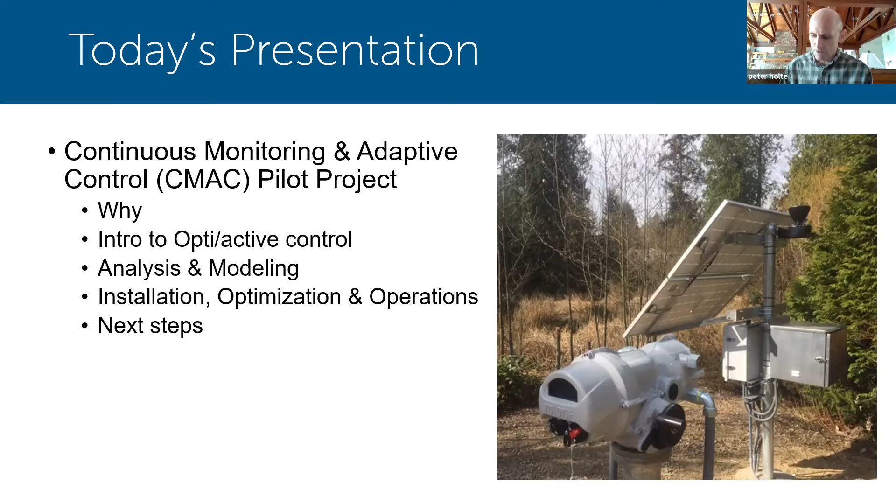So first of all, City of Redmond has a watershed management plan we've had since 2013. It divides the city into about 13 different watersheds. And very simply, the goal of the watershed management plan is to create environmental lift by working in the entire drainages that drain into streams.

One of our watersheds in the upper northeast corner of Redmond is called Monticello Watershed. It's about 345 acres. Part of it is in King County, part of it is in Redmond, most of it in Redmond. It's considered a priority watershed, meaning that although it has some significant stormwater impacts, it also has a great opportunity for environmental lift if we take some action there.

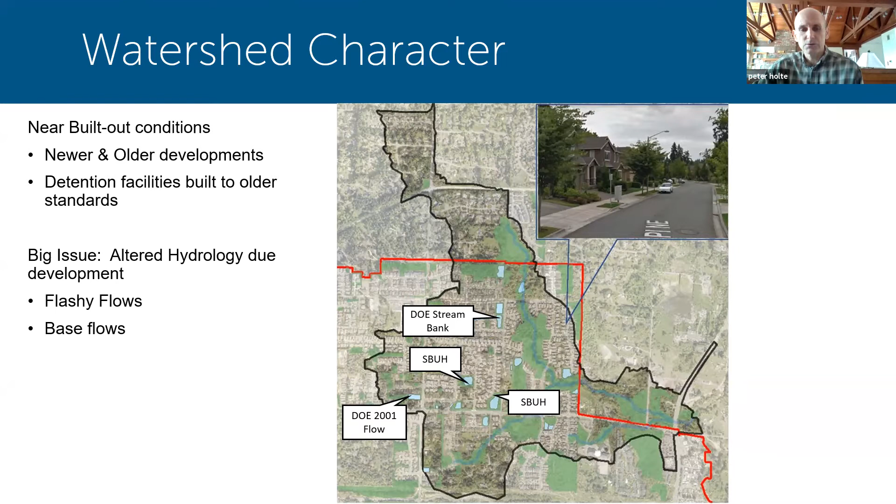So, the real question for increasing environmental lift in this watershed is, how do we deal with the hydrology? And so we know we need to do a couple things. One, we want to try to reduce runoff. And then we also know that we want to extend detention in the watershed. But there's a couple limiting factors that you have to consider when we're trying to do these things.

One of the things is that, like many hillside watersheds throughout this region, this is influenced by till soils. We have till soils that don't want to infiltrate water readily. And so that really limits some of the things we can do there.

Another thing that we have going on is that because we are in kind of a near build-out condition, there's not a lot of space to work in. So if you want to try to rebuild a pond or extend a pond, you can run into space issues. But not only can you run into space issues, you can run into the fact that you're working in an existing neighborhood.

And we have to think about the disturbances that you might have to the neighborhood. And in Redmond, we don't think that going in and tearing apart people's neighborhoods to rebuild a detention pond is going to garner us a lot of support for our stormwater management efforts or for our efforts to rehabilitate streams. So we want to take that into consideration.

And then there's the third factor. Redmond is a very wealthy community, and land values in Redmond are expensive. And so purchasing extra land to build facilities is expensive, and it's something we have to consider. So we know what we want to do, and we have limitations, and then we started looking for a solution to how to address some of these situations.

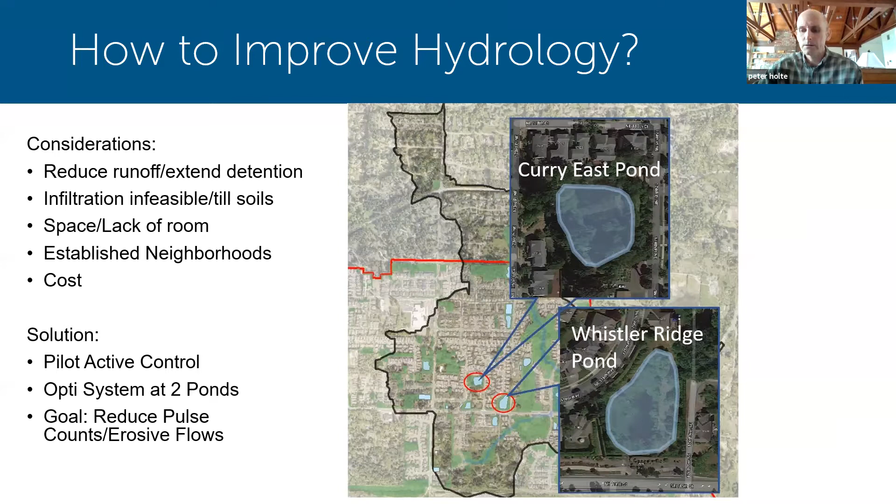And what we are trying is a pilot project. We're trying the CMAC, this Continuous Monitoring Adaptive Control pilot project at 2 ponds using the Opti system. And the goal is to reduce high pulse counts and erosive flows that will cause problems in the stream. And you're probably asking, what is this adaptive or active control? And Matt is going to now explain what it is.

Thanks, Peter. So I think a little background is necessary too from my perspective. I'm a water resources engineer, similar to Josh, and I worked in a consulting world for the better part of 10 years. And about 12 years ago, we worked on a project at my consulting firm to control tidally influenced wetlands, and using Internet of Things connected sensors and local logic on a computer, we were able to control the flows in and out of that wetland.

And so the idea of Opti was born, saying, if we can do this here, why can't we use Internet of Things and technology and software and weather forecasting to solve watershed-based problems? And so this is where Opti sits. We're 12 years, spun out as an independent company about 7.5 years ago, and software development in a product company that lives in the Microsoft Azure cloud.

And we ingest all types of data sources from within a distributed watershed with sensors and water quality monitoring, control, level sensors and control of facilities. And we integrate these with other types of data like precipitation forecasts, weather forecasts, stream flows. And we use all of this information in our software platform to make control decisions that are best for that particular watershed. Peter, go to the next slide.

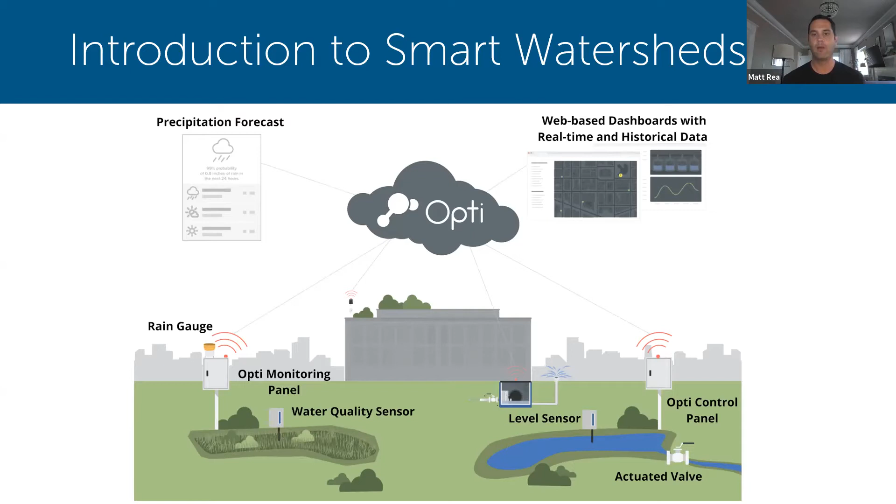So this is how it works on the site-by-site scale. So we take one of these detention ponds or retention ponds, like Peter showed, and they're typically designed with a passive outfall structure, which is a concrete riser or some other type of structure that has an orifice, 1 or 2 orifices, and they were historically sized for just flood control, or they may have some minimal water quality benefit.

And essentially what flows into that basin would flow out during most 95% of storm events. And then every once in a while you get a big event and the facility would fill up and use that volume that it was designed for. So what our software allows us to do is to look into the future at what is predicted to come into that facility through National Weather Service forecasts and other type of third-party local forecasting.

Run it through hydraulic models around that particular facility and its drainage area, and say how much water is going to come into this facility, how much storage do we have in this facility currently, and do we need to release water now, or can we release it in the future, and at what rate do we need to release it to build up the capacity that we need to prevent overflow and to protect downstream resources.

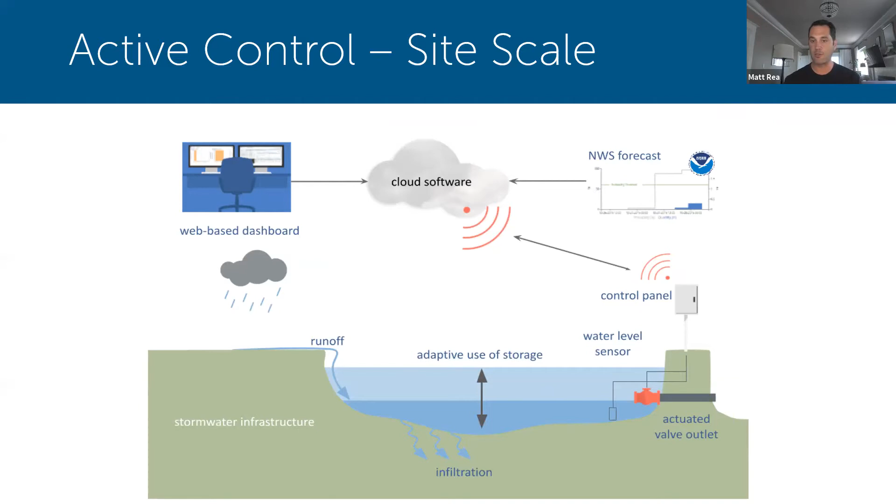We're constantly looking at these water levels in the facility, and we modify those outfall structures with a continuously actuated valve in this case. In some other cases, we can use pump systems or slide gates, depending on what the existing configuration is. But what this allows us to do then is to adaptively use that flood storage and the big volumes of those facilities in almost every single event that we need to, and prevent discharge during most wet weather flows. Go ahead to the next slide, Peter.

And during that forecast period, if the weather forecast, the modeling says that we're going to get more volume in the facility than it can currently hold, we'll start to draw that facility down. We'll open a valve and we'll pre-event release. And that's essentially building new capacity within a watershed without actually building anything, because that's dead storage.

But assuming this is a dry pond, during wet weather, we are closing those valves, allowing the facility to fill up at whatever the typical 2 to 4 year, 6 year event is, holding that water for a specific period of time and then drawing it down after water quality enhancements or 48 hours or 72 hours or whatever regulations dictate for the maximum holding time for those facilities.

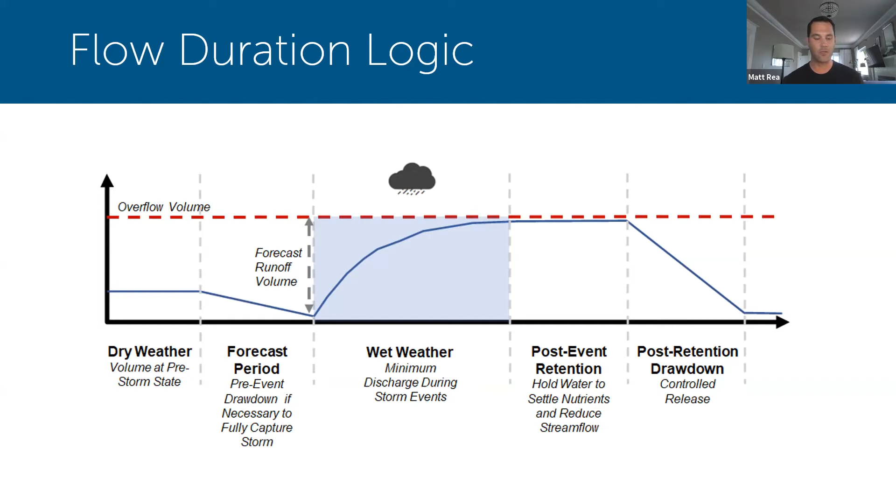And in this particular case, Opti's controls are used for all different types of scenarios. This is more of a water quality scenario with an enhanced retention. But what we're talking about is the flow duration logic and the flow duration control, which sets the system to discharge at the minimal rate at all times that it can potentially do with what's coming into the system. So go to the next slide, Peter.

And how we do that is by enabling a drain while rain function, which allows the pond to drain during these rainfall events, not just having a valve closed, by continuously looking at these different bins of forecast information. These forecasts are ingested every 15 minutes, they're updated, and the algorithms run every 5 minutes based on what's in the facility and what's going to come into the facility.

And then there's a decision sent to the valve as to what state it should be at and what flow rate to release at. And the target is to release at the lowest potential rate so that you never violate an overflow condition, plus a factor of safety, obviously. And so we minimally discharge. We utilize that adaptive volume and that full volume of that pond so that we can essentially trickle discharge or release at much lower flow rates during the entirety of the event.

And what we have found through our installations in Oregon and the other West Coast installations is that we're reducing those pulse counts that cause these erosive flows and the flashiness indices coming out of these streams. Pulse counts and peak flows down by 75% from the current condition, not from the undeveloped condition, not from the unmitigated condition. And then 50% reductions in those flashiness, bugs and bunnies kind of metrics that we study for stream health. And so I'm sure there will be a lot of questions on that, and we can get to those towards the end here.

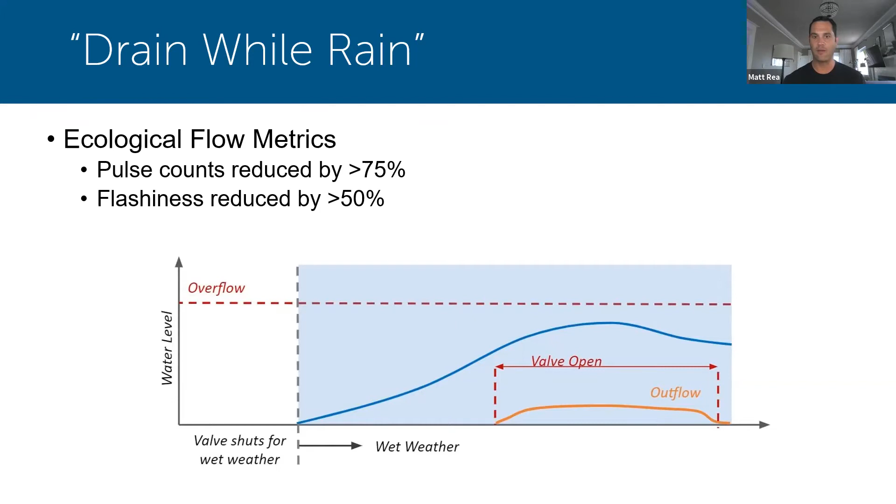But I want to turn it over to Josh here to talk about the model that we built and how we determined where to put these projects. Sounds good. Thanks, Matt.

The criteria that we were looking at for site selection were that we wanted to look at ponds built under previous standards. That's where we expected to get the most benefit. We wanted to model the level of improvement and see what our anticipated improvement was to flow durations. We wanted to look at the cost and see if there were variations in the cost, neighborhood impacts, and then access and security, just looking at the location of the ponds and how secure they are. Next slide.

So for our modeling approach, we started with Western Washington guidelines, using the Western Washington hydrology model, looking at flow durations. We focused on flow durations here because we were expecting that if we improved flow durations, we would also get an improvement in things like the flashiness and the pulse counts that are directly related to the BIBI. So the WWHM model output was then fed into a CMAC spreadsheet that has been developed by Opti.

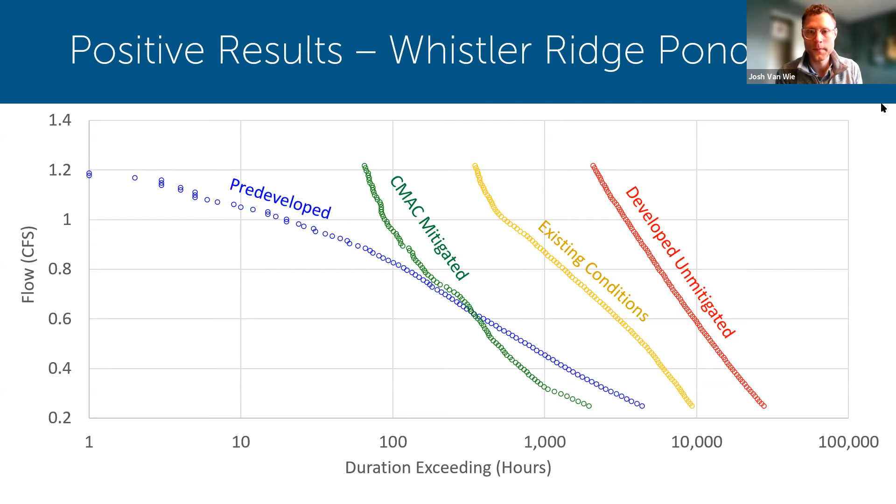So second example, this is one where we saw kind of some mixed results. This was the Fischer Village Pond. Same color scheme here, but what we saw with this one was that at the higher flow rates, the existing pond actually did not do too bad. So the volume is probably okay in the existing pond. At the lower flows, we were exceeding the duration. So this is telling me that the orifice may be oversized and releasing too much water at those low flows.

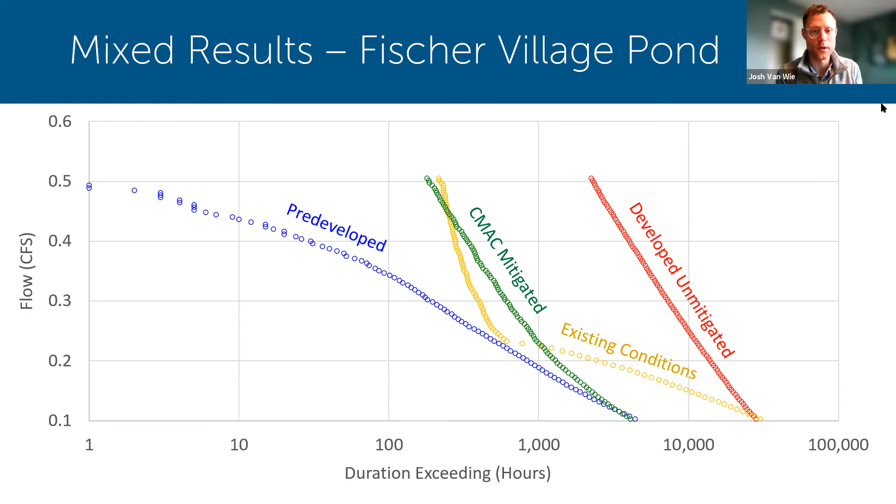So we felt like we could probably get some improvements at this pond if we did a CMAC retrofit, but for our selection, we wanted to pick the two best ponds out of the four we were looking at. So, we saw better improvement at two other ponds, so we decided not to move forward with this one at this time. Next slide.

So some takeaways from our site selection and modeling process. Going back to costs, the costs were fairly similar for each of these locations that we looked at. It was around $150,000, $155,000 per pond. And that's just due to the hardware and the Opti components being relatively similar across the board for each of the sites that we looked at. But when you compare the installation costs for this Opti retrofit with building or expanding the pond, you would expect a lot lower price. So this 150,000 range is going to be quite a bit lower than purchasing adjacent properties that you would probably have to do if you wanted to expand the footprint of the pond. So because of that, it was very cost effective compared to other options that were on the table.

We felt like the modeling was critical for determining the benefits. Just taking a high level view of the plans and drainage reports, we didn't necessarily have a good idea of which ones would show the best improvement. So the modeling really helped us to dial that in and make good selections.

And then the neighborhood factor is just kind of the idea that these can be installed pretty quickly over a week or a couple weeks with minimal impact to the neighborhood. These were on city-owned parcels, so there was no work in the roadway, there was no traffic control required, no impact to neighbors. So definitely good from the standpoint of not causing a long construction project that's going to impact the neighborhood.

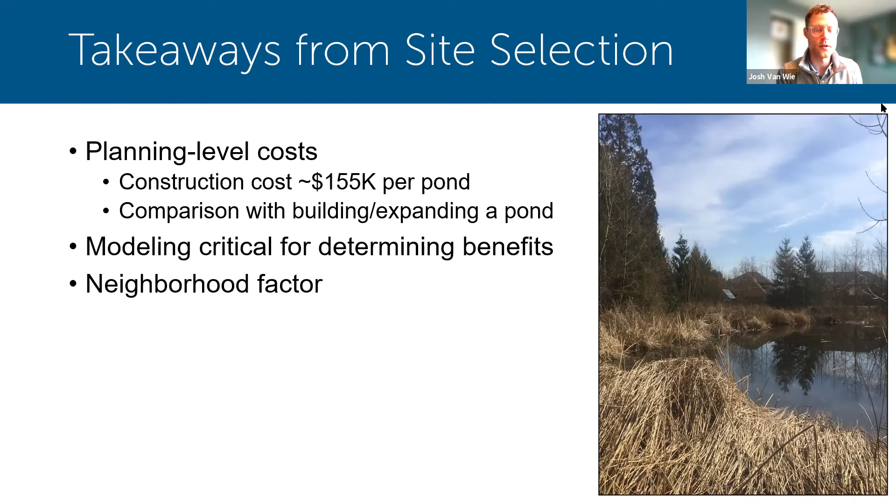Yeah, go ahead. I'll pass it back to Matt. All right, thanks, Josh.

And just a few additional slides kind of about how these actually get installed. Like Josh said, our typical installs are like 3 to 5 days. You can see a contractor here in the center installing a flange for the mounting of the actuated valve. It's a third-party off-the-shelf Rotork industrial grade valve.

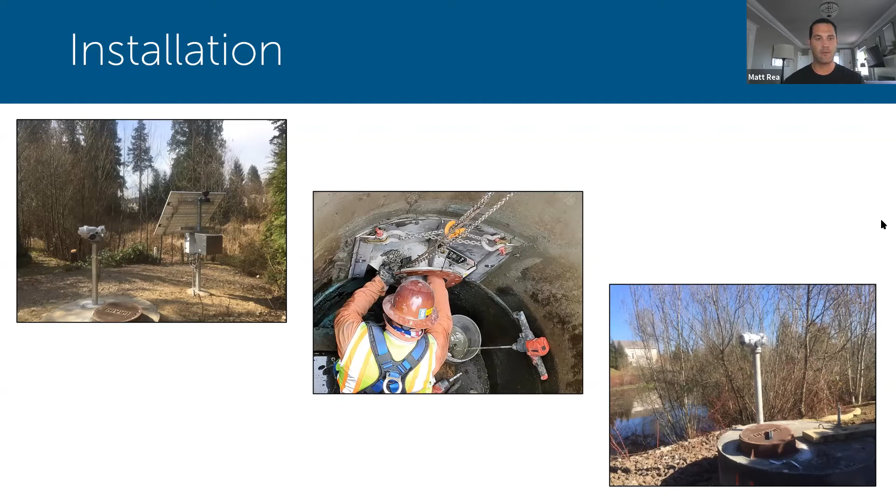We usually block off the low flow orifices during this part of the design. And in the left here, you'll see the actuator sticking out of the manhole with the solar powered control panel, which has all the communications hardware, is wired to the actuator, to the level sensors, has the cellular communications and a 10-day battery system, because everything is solar powered. Even the actuator and all the sensors, everything is powered via solar.

So the next slide, Peter. And then the way we set these projects up is we utilize design resources and hydrology models to set the initial configuration of how the Opti control system will operate that pond and what those inputs are for the runoff into the facility.

And what we do over the first 3-month period, or 5 to 6 events, is we look at what actually happens. Our engineering team actively watches each rainfall event and looks at the rainfall runoff response into that facility versus real rainfall. And we come up with customized configuration parameters for how these systems should operate going forward. And so we send those back to the city and say, hey, here's what we've viewed. This is how the system would have run if we would have used these from the beginning, to look at the operational performance.

And then we go ahead and set that to automatic control, where we do weekly checks on the system to make sure everything is running appropriately, and then annual checks on the performance of those configuration parameters to see if they need to be updated.

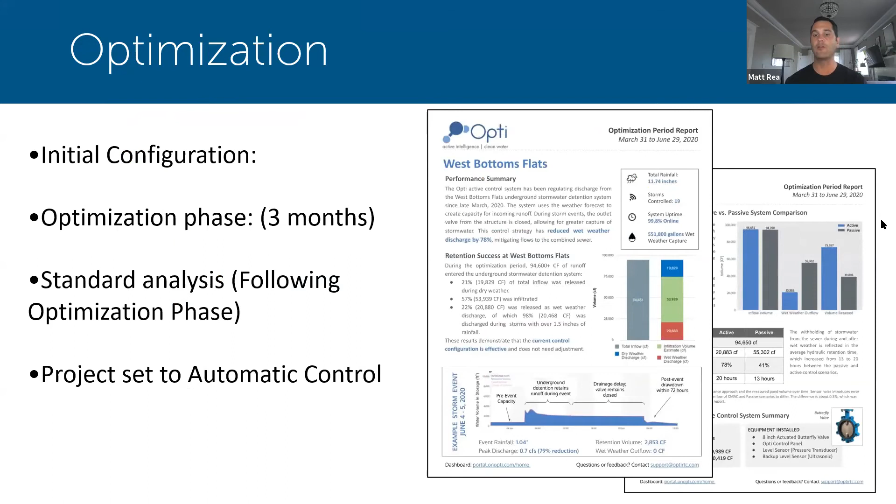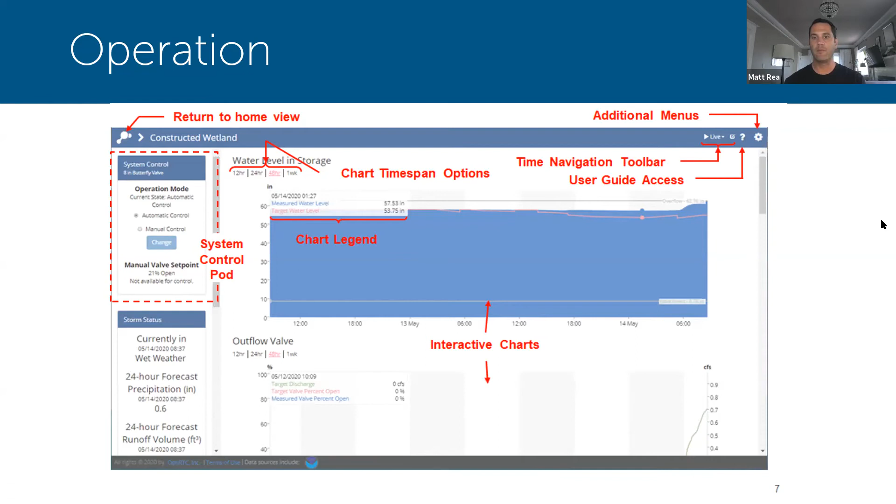So with that, I'll turn it back over to Peter to wrap up, and then I'll start going through the questions.

All right, so a couple of things on next steps about this pilot project. One of the things that I'd like to do is a more in-depth cost net benefit analysis. Hadn't had time to do that, but we found out that just looking at this and thinking about the property values in Redmond, just squinting at it, it looks like this is a solution that, construction-wise, would be about an order of magnitude less than what it would cost to extend a pond. So we want to really dive into that and do some additional analysis on this.

We also want to monitor these pilot projects and see how they're working. And the nice thing about Opti is that it's continually collecting data. So we will be able to look at the outcomes at particular ponds, and then we'll be able to measure that against some of the measurements that we're having in the stream to see if we're reaching the impacts that we want to get. Monitor the watershed as part of the paired watershed study.

For those who are involved in the SAM project, the NPDES SAM project, know what that is. It's a study that's looking at different treatments in different watersheds in Redmond to determine how those treatments are working to improve conditions in streams and cause environmental lifts.